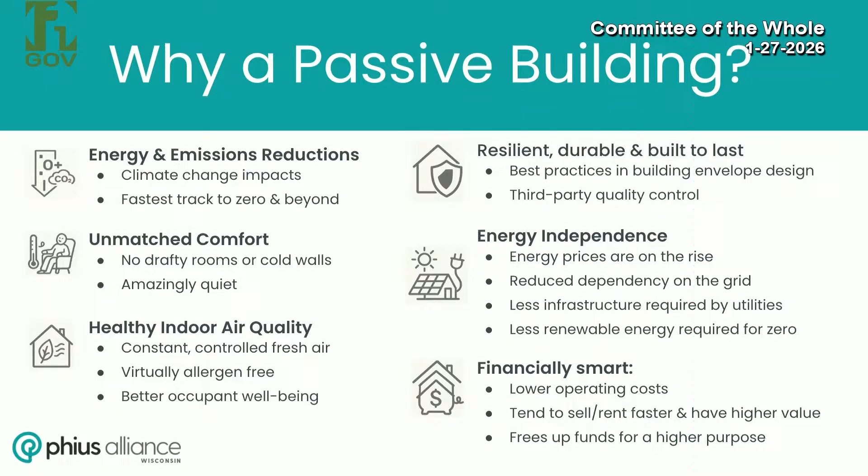And then financially smart. Lower operating costs is the obvious sort of first thing. They also tend to sell faster and rent faster and have a higher value. It also frees up funds for a higher purpose. There's the Rethke Terrace in Madison, which is a commercial PHIUS certified building. It is transitional housing. They have been able to take the savings from lower operating costs and divert it to the people that are moving through their program. So they have more money for services because they're spending less on energy. So that's why, I hope that was convincing.

So let's move forward. I always like to mention this. It's kind of fun. Comes in any flavor. People have asked me many times, like, oh, does it have to look a certain way or be a certain way? And I say, no. It can be any style that you want. Here's a bunch of houses that are kind of making that example for me. Multifamily, most of these projects are from either coast, but there is just a whole range of styles that you can apply. You don't have to be limited by one.

Also worth mentioning, offices, schools, churches, PHIUS certification can apply to any of these. That building on the lower in the middle is actually the first certified building in the country that's commercial, up in Bemidji, Minnesota, so one of the hardest climates to design in. And then even high rises are starting to come online, being PHIUS certified.

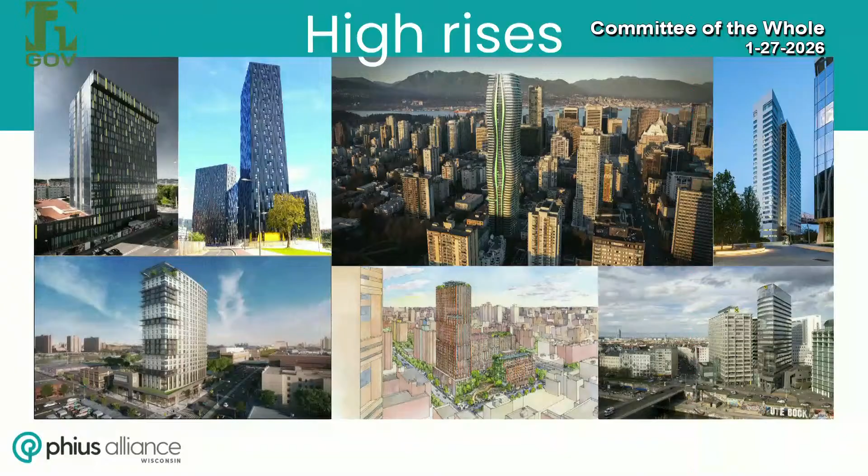So I've told you about the benefits.

What is it? In its simplest form, it's an integrated building design and construction concept that employs building science fundamentals to attain high levels of comfort, durability, energy efficiency, indoor health, and resiliency. So you can see at the bottom left, it's a set of design and construction principles we'll get into in just a minute. Together, when applied along with quality assurance, it results in a certification.

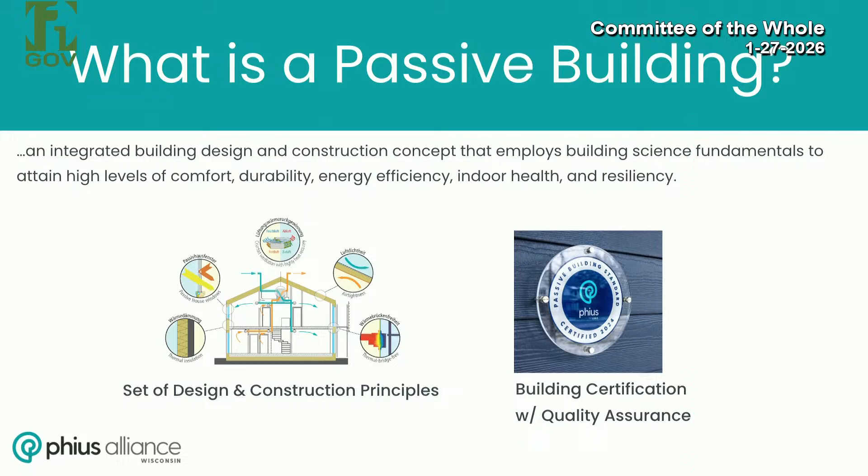I talk about it being the smartest way to zero or net positive because I believe it is. The conservation-first approach is really near and dear to the whole PHIUS program. It says it provides energy savings of 40 to 60% compared to conventional buildings, but what are you really comparing it to? What is a conventional building? One built a couple years ago on the 2015 code is going to be a bit different than one built next year on the 2021 commercial code. But that's not what's important on this slide. I think what's important, if there's anything you take away from tonight, is this idea of the conservation-first approach: we first drive down our heating, cooling, and electrical loads as much as possible before fancy systems, before solar.

So why is it called passive? I always think of it as this building passively resisting its environment. It's able to stand on its own without solar, and in the case of emergency, potentially without any heat input, although we do not want that. So the conservation-first approach is the most important aspect, I would say.

These are nice graphics, showing a conventional building and the amount of energy reduction you'd see in a passive building.

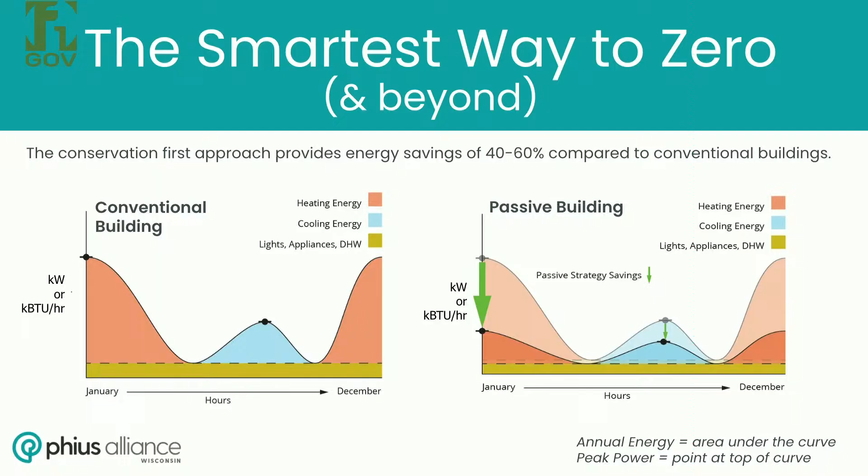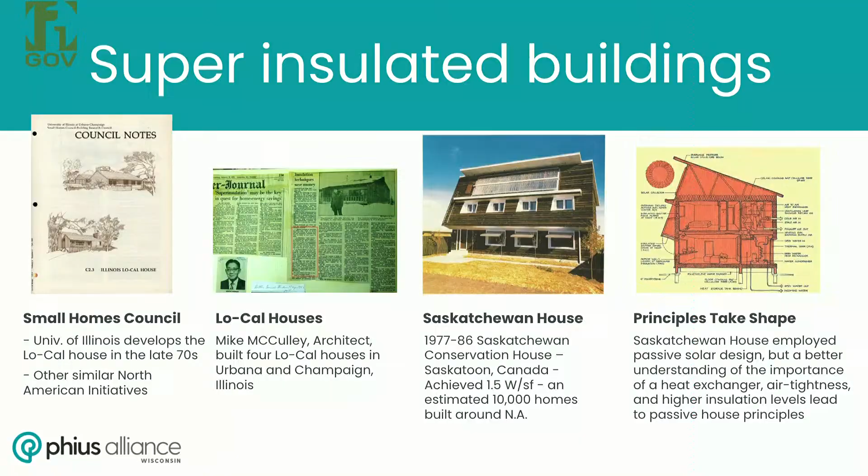Not to bore you with too much history, but I like to mention this because I find it a source of pride — it always brings a smile to my face to think about how these principles are rooted in the Midwest. A lot of the idea of passive solar or super insulation came out of research done in Illinois, Canada, and Wisconsin. All of this was happening early in the 70s and a little into the 80s. But at some point there wasn't as much interest, because the energy crisis was over.

But the Germans still felt the need to conserve energy, and they gathered up all their research and all of our research and developed the Passive House program. That's Dr. Feist and Dr. Adamson, who I mention on this timeline. Kat Klingenberg, the leader of PHIUS, was working for them at the time, and she brought these principles back to the U.S. and started the Passive House Institute US.

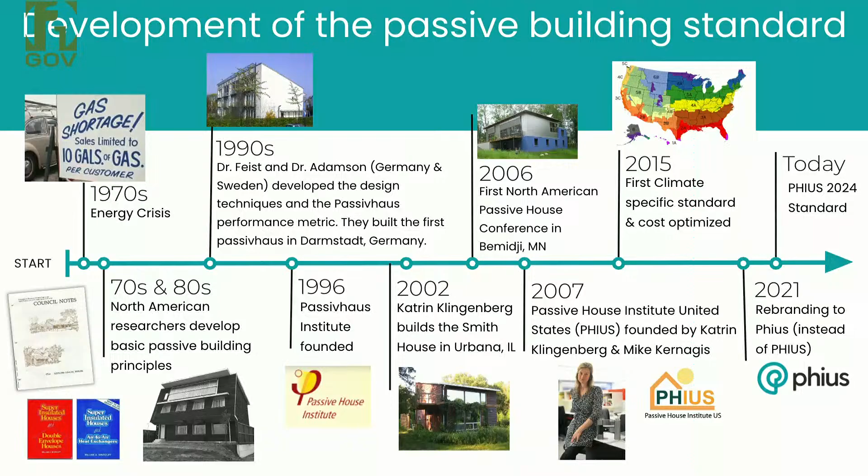I'm going to flip to the next slide and talk about the next piece on the timeline: climate-specific and cost-optimized. When the Passive House standard first came out of Germany, the focus was very much on Germany's climate zone, which is more like southern or central Illinois. But what Kat and the folks at PHIUS found over time was that it's not a one-size-fits-all approach, so they started developing the climate-specific standard.

What they were seeing was that folks in California or down south in Texas were able to meet the passive standard, but they were leaving a lot of affordable energy savings on the table — it was too easy. Up in the north, in our zone, up in Climate Zone 7, in Alaska, it was almost too hard. So we ended up putting in too many windows and overheating in the summer, or getting to 12 inches of insulation for a house.

I'm still not quite meeting it with the energy model, so I add 3 or 4 inches more, and you're looking at diminishing returns kind of when you get to that point, and they recognize that. So they were looking at that, and they were also looking at the cost optimization. Their approach is to set the standard just over the knee, meaning it's just a little bit better than that financial sweet spot, but before you hit that moment of diminishing returns in the investment, whether it be insulation or air sealing or whatever.

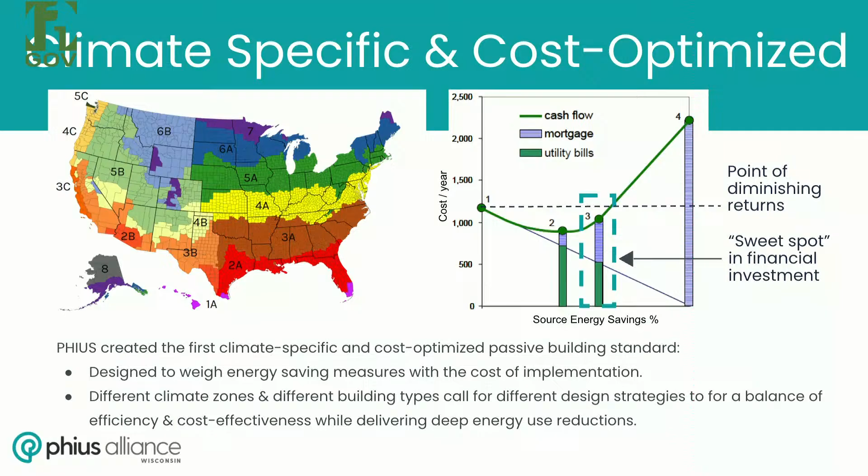The other thing that's important to note is the quality aspect. The program leads a project team through everything that they need to do to maintain quality. In design, there's an iterative review process, so while you're in the design phase, you're back and forth with the PHIUS certification team to develop and further develop your design and continue to meet the program goals as much as you possibly can. And there's an energy model that goes with it.

There's a proprietary software that is used that comes out of Germany, and it's got proven and highly predictive results. They've actually tested it many times, and in the beginning they were wondering why their performance didn't match up with their energy modeling, and what they found was thermal bridging was the cause. Once they fixed that problem, they were seeing the results. So they've very much compared the energy models to actual operation.

And then you get design certified before construction even starts, so it's like a pre-certification. And then in construction, you have careful implementation of critical details to meet your performance targets. That's really important, I'll talk about that a little bit more later. And there's the third-party verification, so you'd have a person that's a verifier involved. And you also do blower door testing. You don't get final certification until all of that is complete.

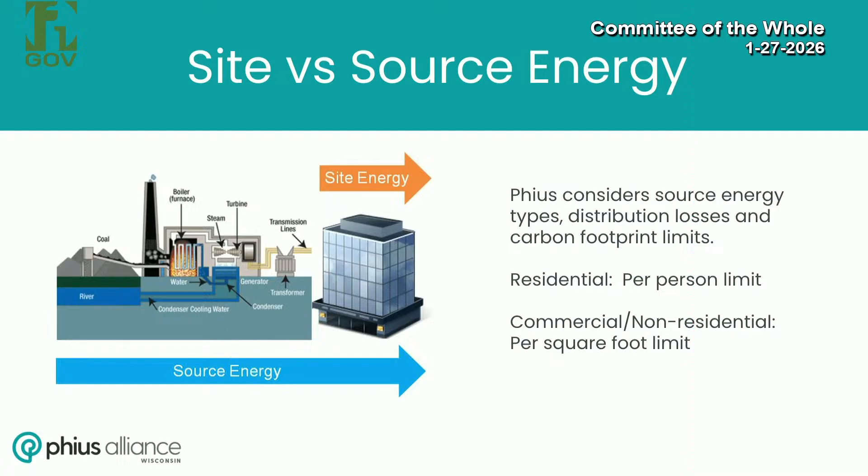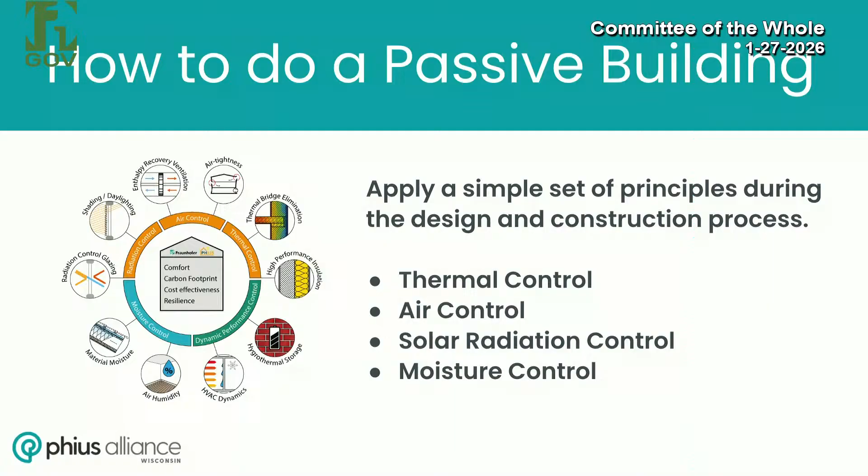Okay, so now I'm gonna get into how to do a passive building. How do you put it together? And it gets a little technical. I'm gonna try to stay as high level as possible, but I think it's important to present these main principles at a high level so you can kind of understand what goes into a PHIUS building or passive building. So the four of them are thermal control, air control, solar radiation control, and moisture control.

So with thermal control, it helps keep the inside warmer when it's cold outside and cooler when it's hot outside to maximize comfort and energy efficiency. Seems pretty simple - that's what insulation does. So we're going to talk about the high performance enclosure and thermal bridges.

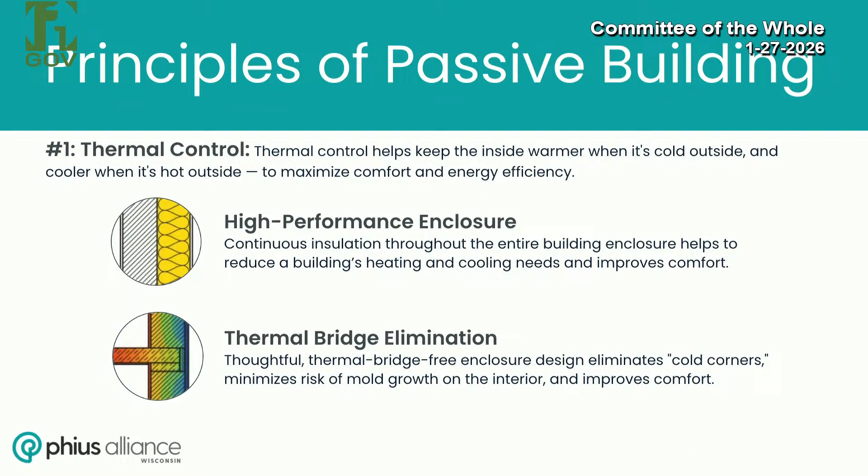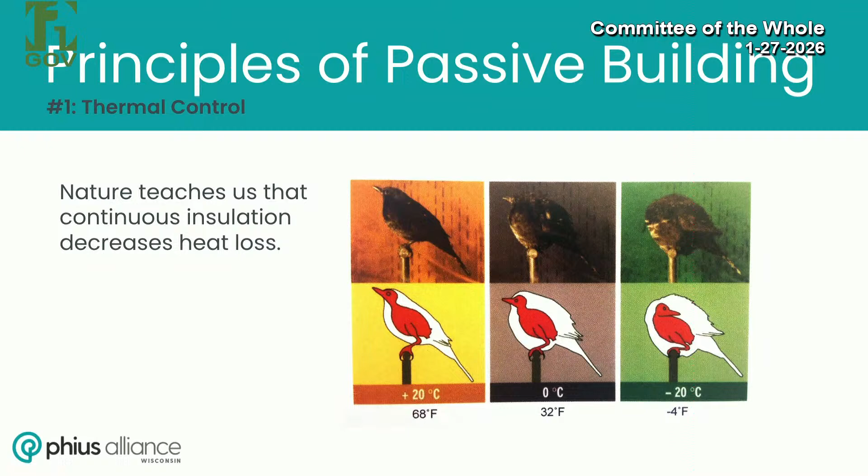So what we want to see is continuous insulation. Nowadays we build things and it has insulation, but it doesn't necessarily mean it's continuous. For example, where we're having walls meet floors, walls meet windows, or a wall meet the slab - these are moments that are really challenging because you have to make sure that that layer is actually continuous.

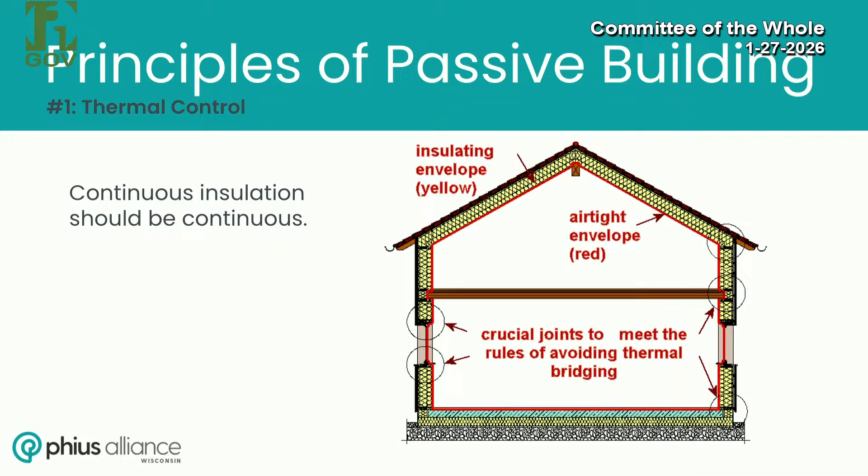And I always like to tell people - this would be architects mostly - take a building section, put your pencil or your marker down, and try to draw that thermal envelope layer. If you ever have to pick up your pencil, you know that you have a gap, you know that you have a moment that you have to solve. So that's a good trick to understand this. And then the other piece is thermal bridging, so you might ask what that is.

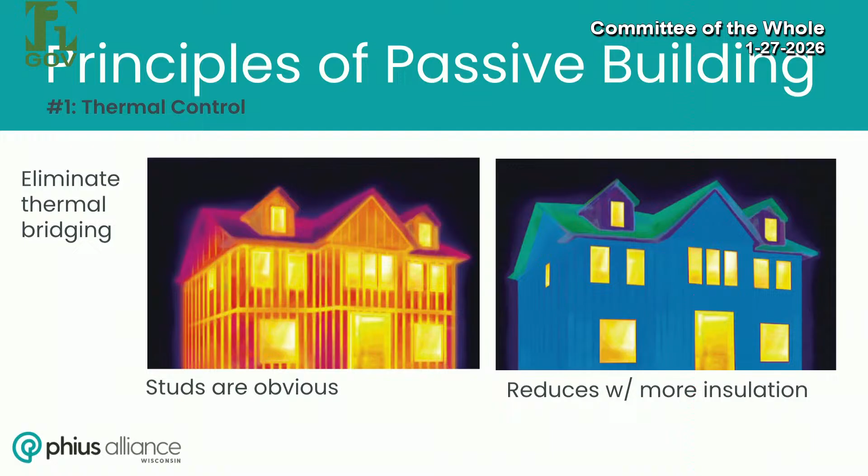The other thing to think about, which is really important, is mold risk. When you have a thermal bridge, that area is cold. Go home tonight and put your hand up against the wall—you will feel that it's cold, and there's probably some areas that are colder than others. The notorious one is like behind the shelving unit, where nobody ever goes, or behind the couch.

And when you have a thermal bridge and it's incredibly cold and you have warm, moist air, it ends up condensing upon that surface, and that can cause mold. It can cause mold on the surface, or potentially it's causing mold inside the walls or your floor system, and that's not good for anybody. It's not good for humans—we don't like mold, we get sick around it—and it's really not good for the building either. I mean, nobody wants to have a building that's rotting.

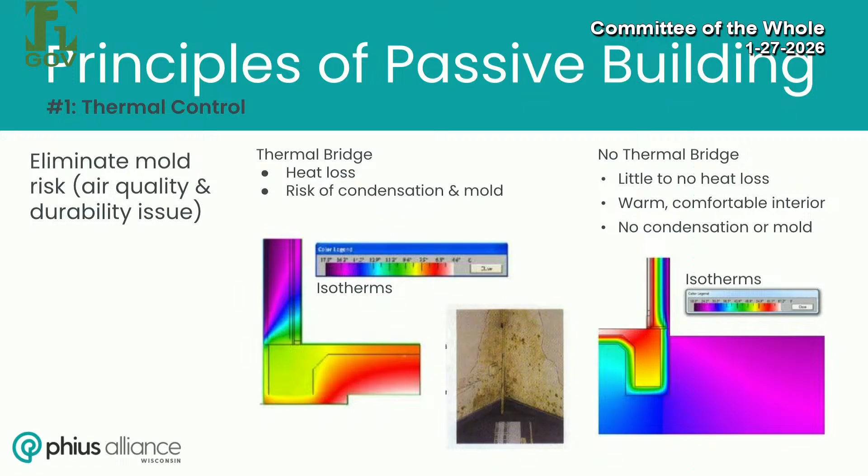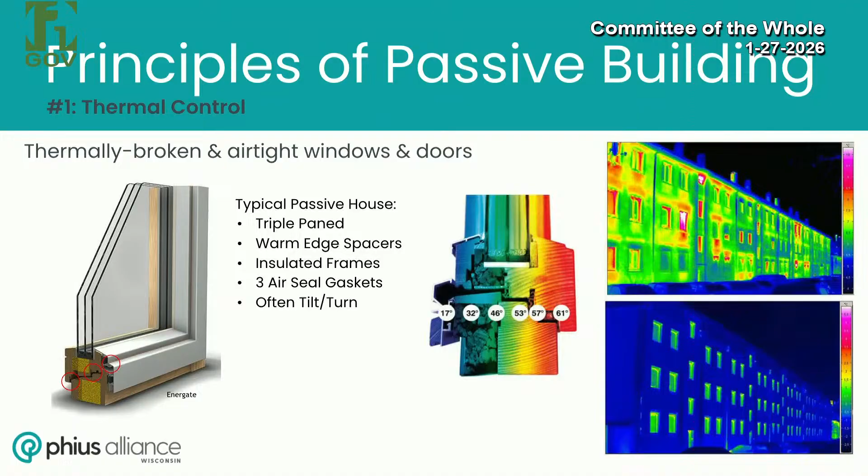One more thing about thermal control is compact shape. The more compact your shape is, the less heat loss you'll have. So when I talk to designers about the design of a passive building, try to keep your shape as compact as possible. Every time you make a jog or a jig, think about: is this intentional? What purpose is this serving? Often we do need a few of those, but trying to minimize them in order to reduce surface area and reduce heat loss is a really good way to go, especially in our cold climate.

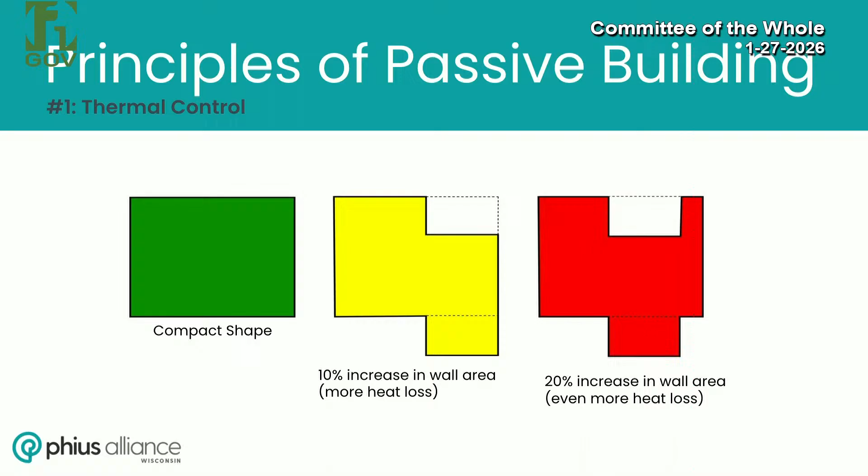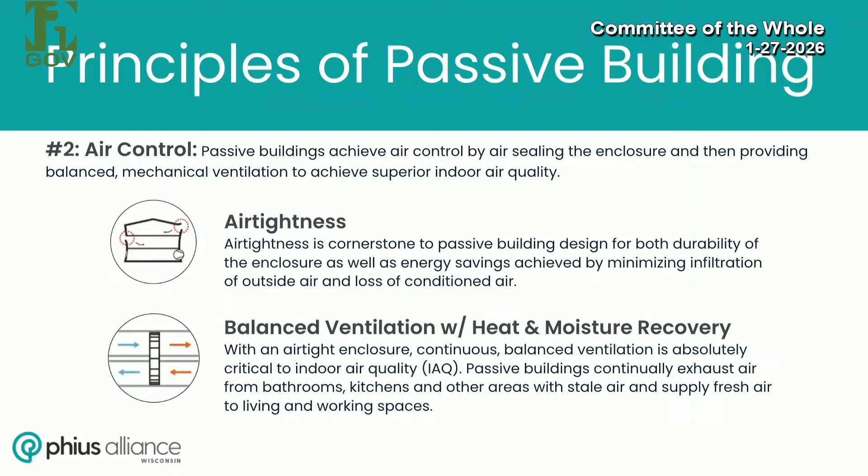So that was thermal control. Now let's look at air control. Passive buildings achieve air control by air sealing the enclosure and then providing balanced mechanical ventilation to achieve superior indoor air quality. So we'll look at air tightness and ventilation.

First off, air tightness. Air infiltration can account for up to half of a building's heat loss. So it's not just about that continuous layer of insulation—it's also about that continuous airtight layer. Same strategy: take a building section, put your pencil down. Every time you have to pick your pencil up, you've got a problem that you need to now solve through creative detailing. So whenever there is some sort of air leak, that's contributing to your heat loss. It's really important to have an airtight layer.

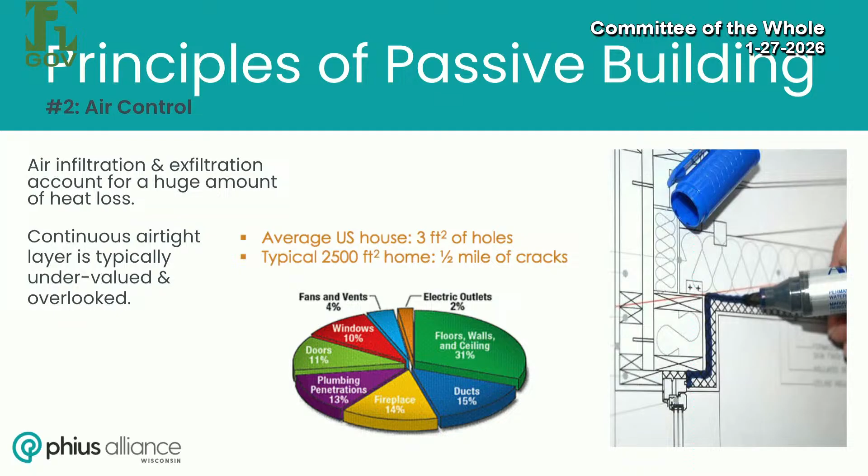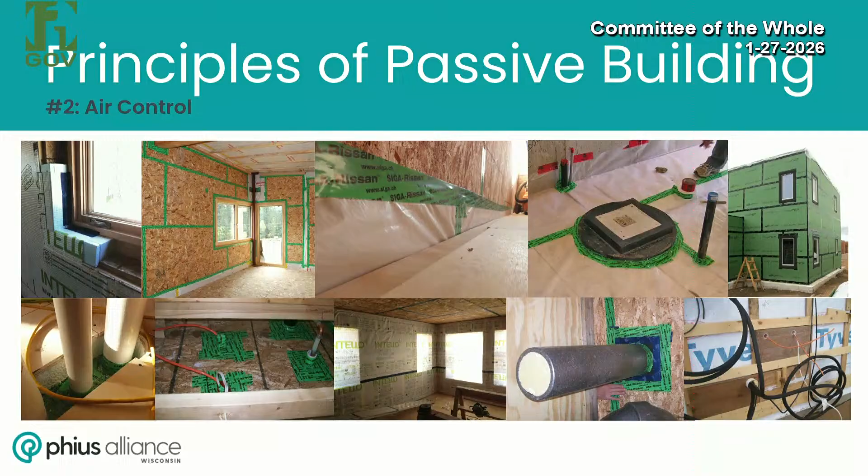And here's some examples. When we start to get really airtight, every little other hole tries to force that much more air through it, so we have to get really detailed about what we do. The upper left picture is an example of sealing an interior air barrier right to the window with a high performance tape. Most of the pictures on the bottom, except for the middle one, show moments where there are penetrations through the envelope—things like wiring, a line set, or up at the top there's a sump pump. We want to seal all of these things to the air barrier so we can have that continuous air barrier all the way around the envelope.

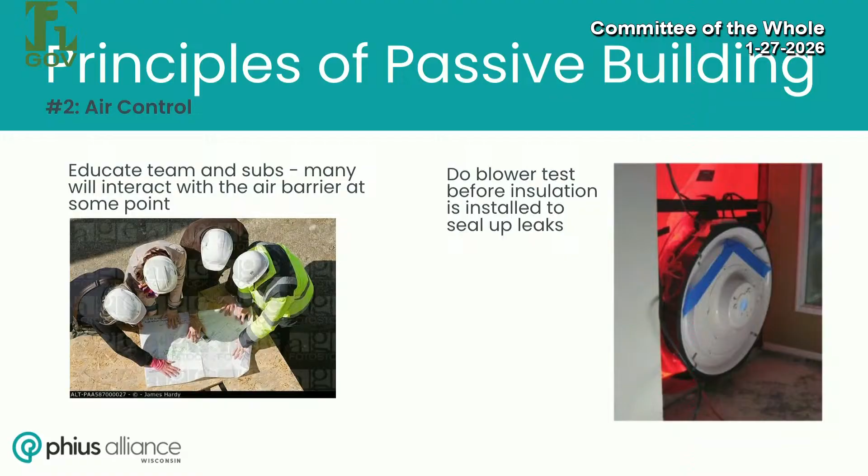The other part I like to mention is air control: educating your construction team and all the subcontractors, because they're all going to interact with this at some point. The air barrier is precious, and we need to let them know not to hurt it and how to interact with it. We always do blower door tests before insulation and finishes, so we know the air tightness before we close it all up and can't get to it anymore. We do it while we can still access the airtight layer, so we can add additional tape or sealant wherever we need to close things up.

Then there's air control for fresh air. To reiterate, buildings don't need to breathe, but people do—we evolved to breathe fresh air. But we have all this air in our building that we just heated, with the sun, internal gains, or mechanical systems, and we don't want to just throw all that heat away. That would be silly. So we use an ERV, an energy recovery ventilator. We take the stale, warm air from the house and send it out, and bring in fresh, often cold, Wisconsin air. The ERV doesn't mix the air, but it has a mechanism that moves the heat from the outgoing air into the incoming air, so we're not throwing the heat away while still introducing fresh air.

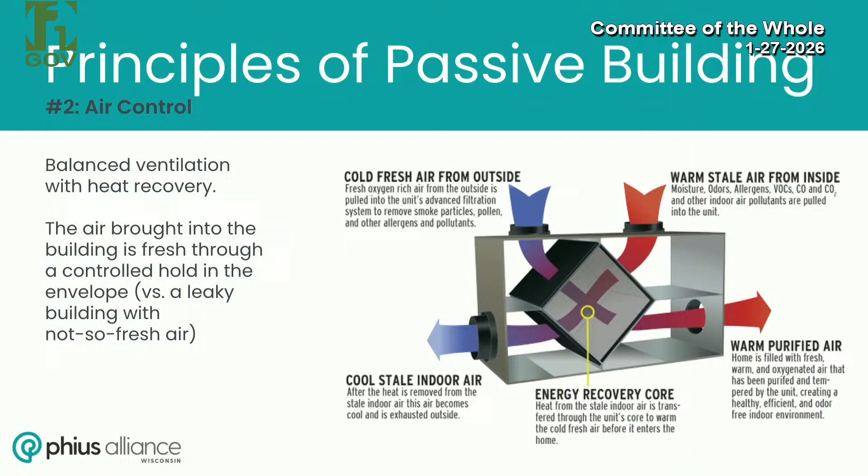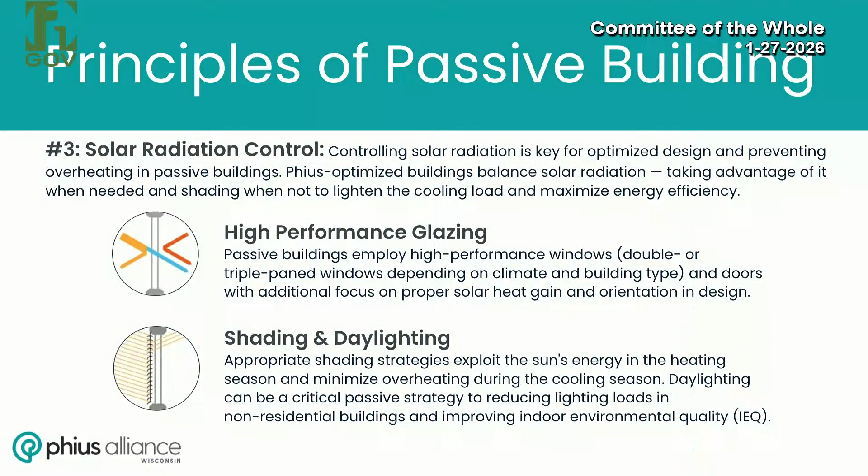Third one: solar radiation. Controlling solar radiation is key for optimized design and preventing overheating in passive buildings. Optimized buildings balance solar radiation, taking advantage of it when needed and shading when not, to lighten the cooling load and maximize energy efficiency. So we're going to look at glazing and shading.

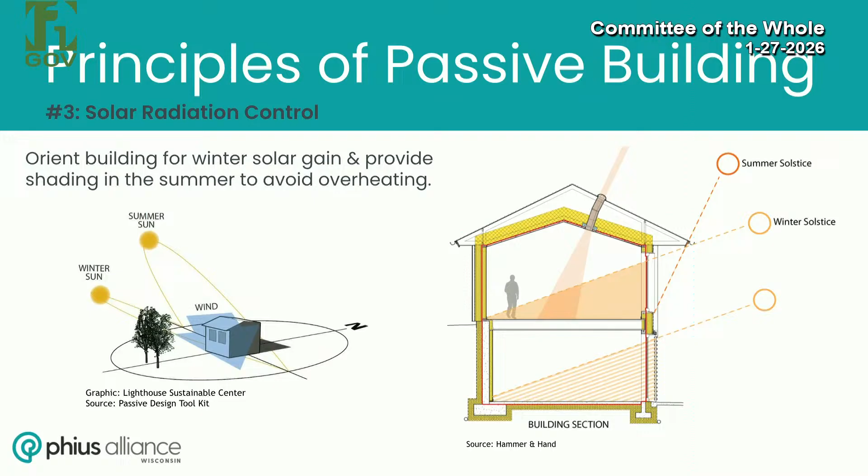In this diagram, at the winter solstice, when the sun is lowest in the sky, we're introducing heat into the house, which means your loads are lower—you don't need to use mechanical heat as much because you're using the sun. Then we have to have an overhang or some sort of shading element, so in the summer, when the sun is high, we don't introduce that heat, since we're trying to cool.

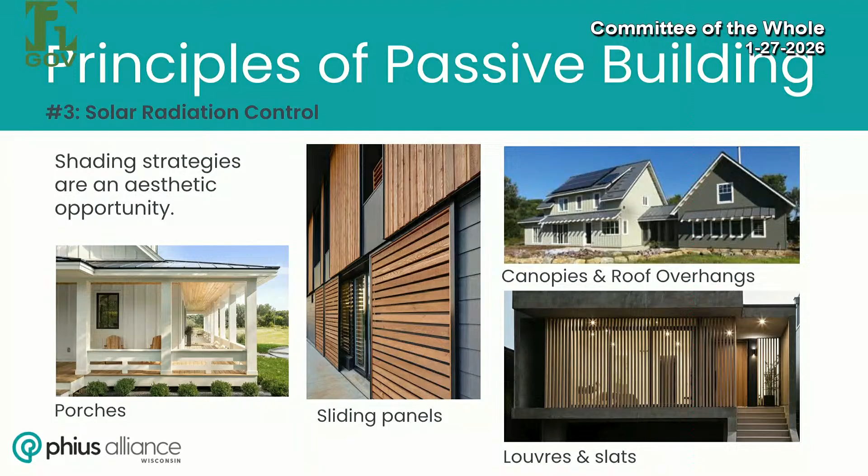There are a lot of shading strategies—anything from a front porch, cool sliding panels, canopies, louvers, slats, and the list goes on. What I love about shading is that you've created this nice little compact box, but it doesn't have any interest, it's just plain. Shading is one of the ways we can introduce architectural interest without increasing surface area through lots of jogs in the envelope.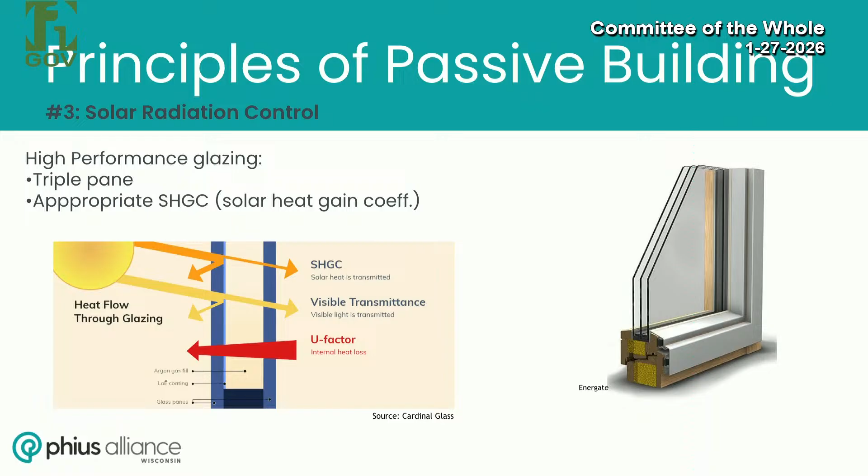Finally, high performance glazing—I mentioned triple pane, but there's another factor: solar heat gain coefficient. That's how much of the sun's heat the glass itself, with its coatings, lets in versus keeps out. Remember when we had all those incentives for more energy efficient windows a while back? Most of those windows were designed on a national scale, so they had very low solar heat gain coefficients, which is great for Florida or Arizona. But up here, we really want to use the sun's heat as much as we can, so we want a higher solar heat gain coefficient, like 50%, as opposed to maybe 30 or less for a project down south.

Is there such a thing as a glazing that takes advantage of direct sunlight but not more glancing sunlight—some kind of prismatic glass? I am not aware of that. I would think that would be done through mechanical means instead.

Sometimes people will tune their windows, meaning on the south side they'll have a higher solar heat gain coefficient, and on the north side they'll choose a low one because you're never getting sun there. That's one way to balance it, along with designing physical shading, which is definitely important.

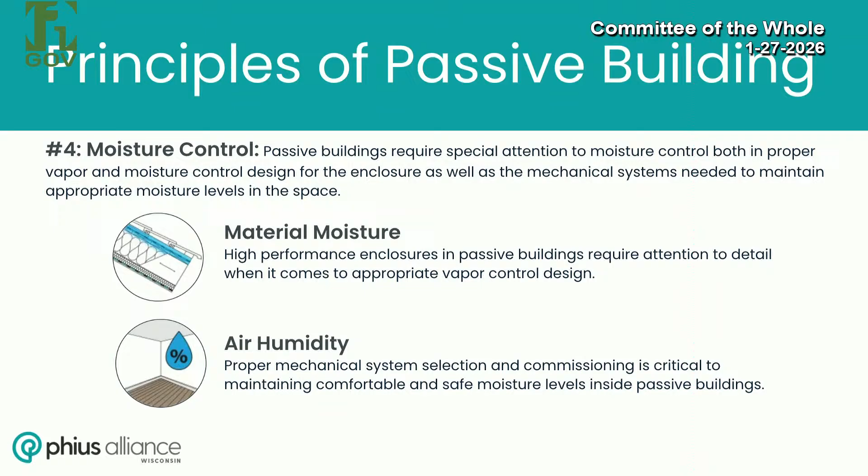Now we'll talk about moisture control. Passive buildings require special attention to moisture control, both in proper vapor and moisture control design for the enclosure, as well as the mechanical systems needed to maintain appropriate moisture levels. So we're going to talk about material moisture and air humidity.

There's a very egregious example of mold. Most of us don't ever experience that, but as I said before, mold and rot is really not great for people. We think about this in terms of vapor, but it's also important to think about bulk water. Driving around, I see such a wide variety of quality—the one I see most often is Tyvek house wrap kind of flapping in the wind. I really worry about materials getting wet and whether they'll have the opportunity to dry out. So it's really important, whether you're doing PHIUS certification or you're just your average architect, to think very carefully about how to manage bulk water.

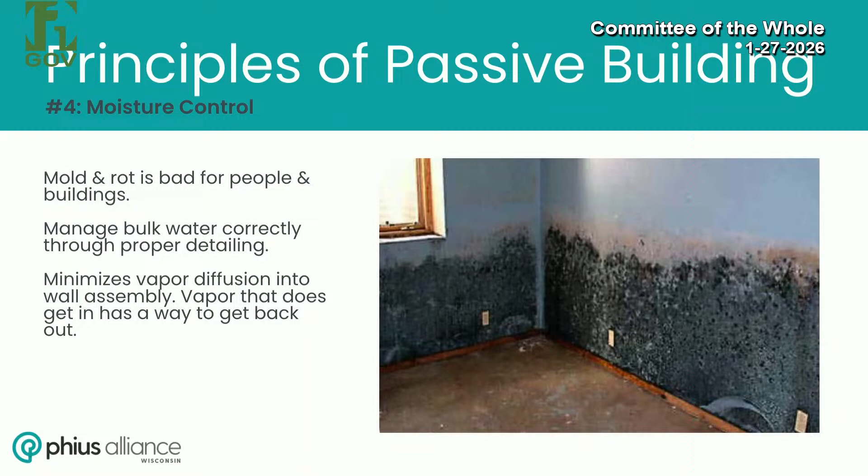What I mean is rainwater, the water on the outside. We also have water on the inside, in our air, from taking a shower, from plants, or from breathing. We want to minimize vapor diffusion into the wall assembly, and if any gets in, we want to make sure it has a way to get out. From a building science perspective, this is the most complicated topic—challenging to understand even for building professionals. I could get really technical and a bit geeky, but I'll spare you tonight.

The other thing we want to think about is humidity. The main point I want to make is that people get excited when the heating load is low and the cooling load is low, thinking they've done such a good job. But there are stories of buildings here in the Midwest where people say they're still struggling with dehumidification. It's true—we live in Wisconsin, where the summers are hot and humid. So even though we may not have much heating and cooling to do, we still have to deal with humidity. That's really important to consider.

So those are the principles in a nutshell: thermal, air, radiation, and moisture. When you combine that with energy modeling, quality control, and just a darn good team, you'll be able to get a PHIUS certified building.

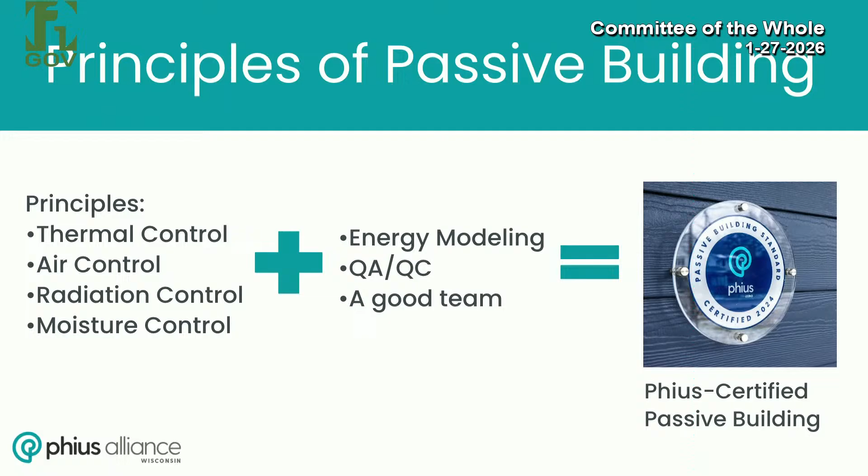Now I want to talk about what's been happening in Wisconsin. Like with anything, the cool stuff seems to start on the coasts—Pacific Northwest and California have a lot going on with this. New England, I'm looking at them a lot too; they're closer to our climate zone than the folks out west, and they're doing a lot of work as well. It's a little slower, but bit by bit it's coming into the Midwest.

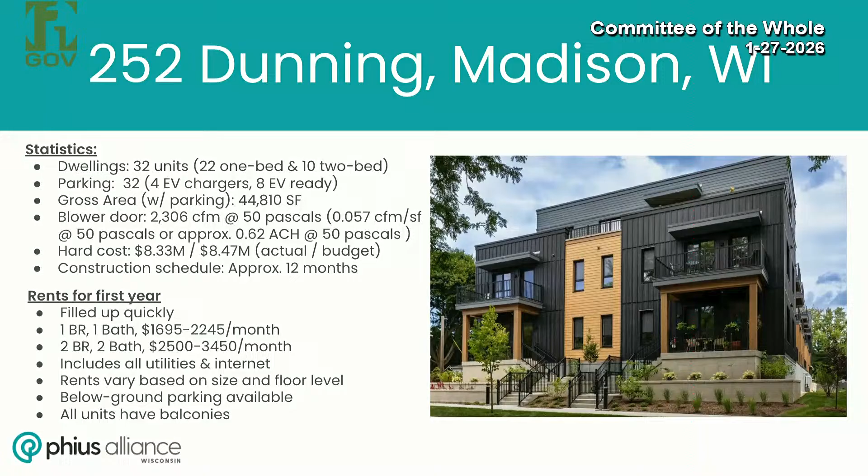The parking isn't necessarily guaranteed, but there is parking available. All of the units have balconies, which I think is really great. This is in a cute little quiet neighborhood on the east side, so it felt appropriate to me.

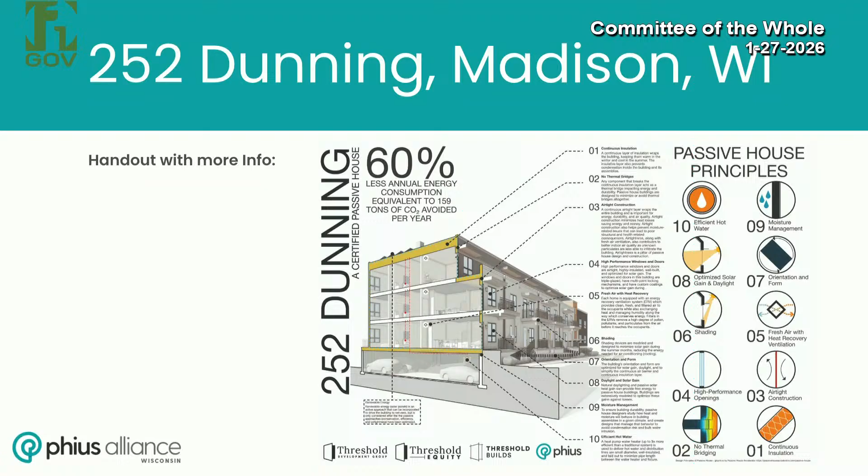Moving forward in Wisconsin, I obviously want to see more of these, and I think it's great. I'm very grateful to you all for having invited us here to talk about this. I have been doing this since 2012, and to see interest growing now is really exciting. I see every conventional building that gets built as a missed opportunity. I understand why they get built, there are realities we have to face.

But I think moving forward, we can learn a lot about what we can do to not have to build conventional buildings. Are we going to see this in 30 years? Maybe a building lasts 50 years, are we going to replace it with something better then? Or can we just do it now? Let's figure it out.

Municipalities like yourself have the opportunity to assemble your own set of tools to drive development of these new buildings, so I want to talk about them. First, I'll say I am not a policy expert by any means. It's something I've been learning about a lot in the last year.

PHIUS is actually going to be developing a committee for policy stuff, so we'll learn a lot more and be able to share that information. I have a feeling I'll be suckered into joining that committee, but I'll be happy to do so. It's something I want to learn a lot more about.